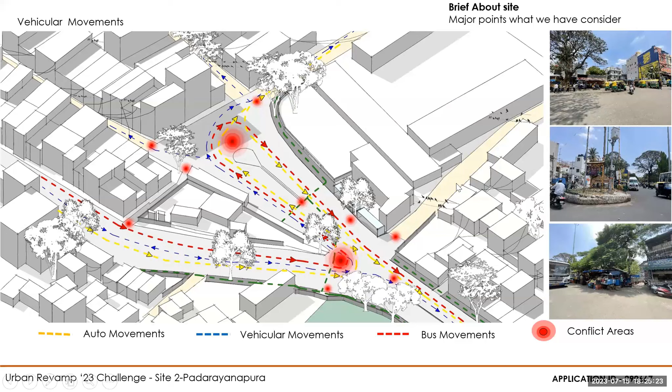So this is what I was talking about, the overlapping of the modes of transportation movement, which is actually inviting certain conflict areas, already marked in red.

Next. Next. Yeah, just give me a minute.

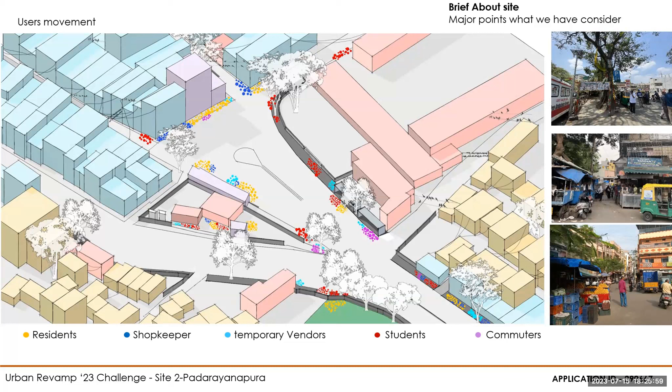And if we talk about user movement in the area, they are on the edges, but they are encroached by the different on-street activities, which we have already shown and are seeing in this photograph.

Next. Next, yeah sorry it's taking a while. Okay.

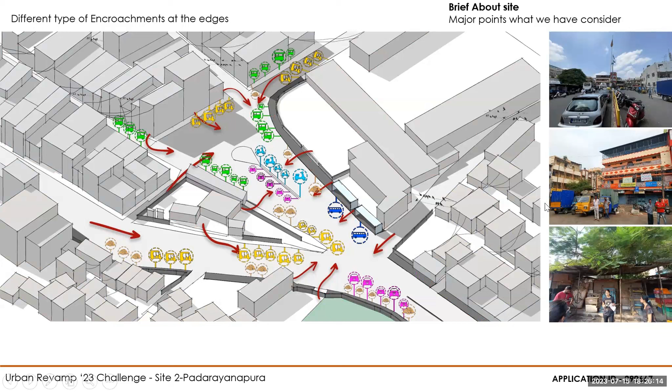So the edges are encroached by different on-street activities like vending, parking, garbage dump, and unauthorized auto stands, etc.

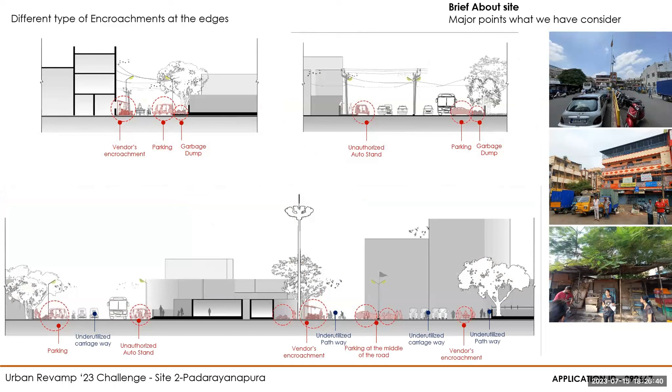Which can be clearly seen in this section slide, where on major roads or internal areas, unauthorized parking is happening actually in the middle of the road, and in the small streets there is also vendor encroachment and parking, which leads to unorganized pedestrian movement.

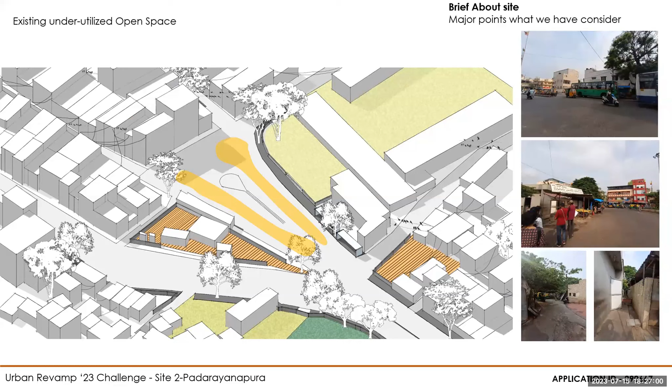So the edges are very active and in conflict with a lot of activities together, but there are certain underutilized open spaces existing on site, and some of them are actually unapproachable.

So after the physical analysis of this site, the focus of the analysis was also on issues raised by the stakeholders. Based on stakeholder interviews and findings from the on-site workshop we attended, we found there are 4 major points or aspects to be considered.

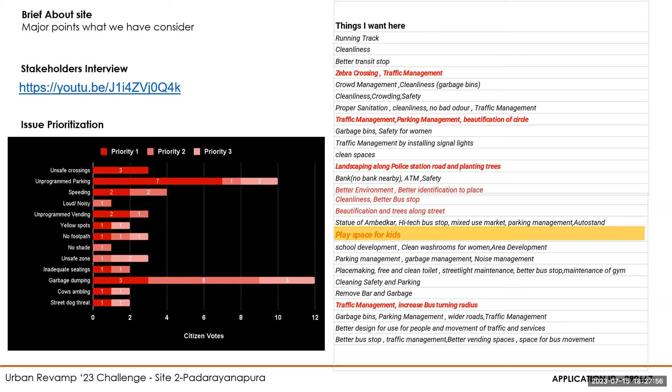So these are the things they already asked for in the stakeholder workshop. From this, we considered 4 points: enhancing the value of open space, inclusive street design with dedicated pedestrian movement, dedicated space for existing activities like vending, parking, bus stand location, etc., and carving out new opportunities.

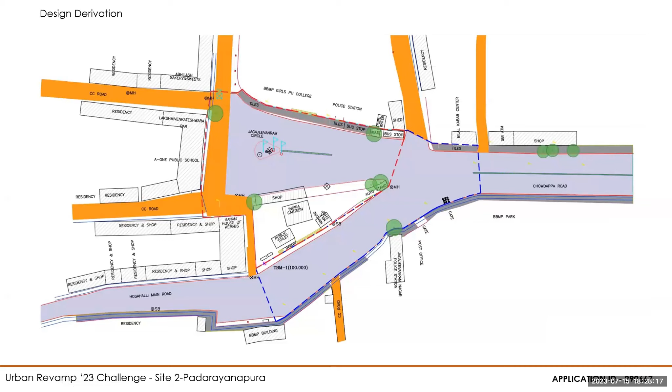So carving out the new opportunity, which is a recreational area for all age groups.

If we see the existing circulation pattern, the neighborhood is not connecting to the main Hosahalli road directly. It is connected with a very small narrow lane, which again has so many yellow dots—a lot of open space is underutilized.

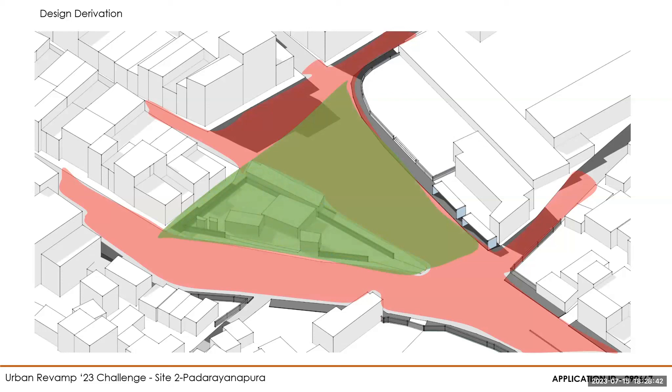The triangular activity land island is dividing the space into two.

So one large chunk of open space can be carved out from this kind of neighborhood.

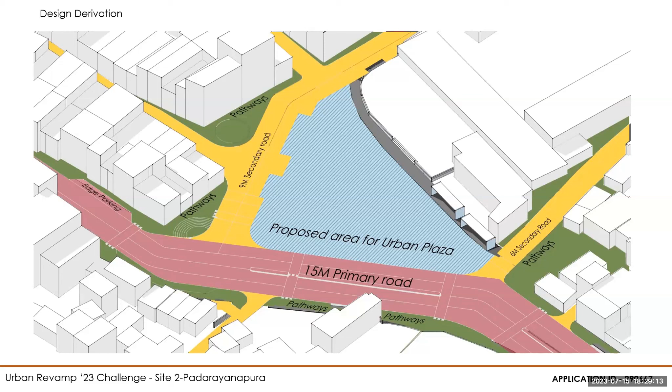So what we considered is connecting the 9-meter neighborhood road with the 15-meter primary road, which is Hosahalli road. This primary road can be designed with an evenly distributed 15-meter section with pathways on both sides, and there is a huge proposed urban plaza that can be carved out from these underutilized open spaces.

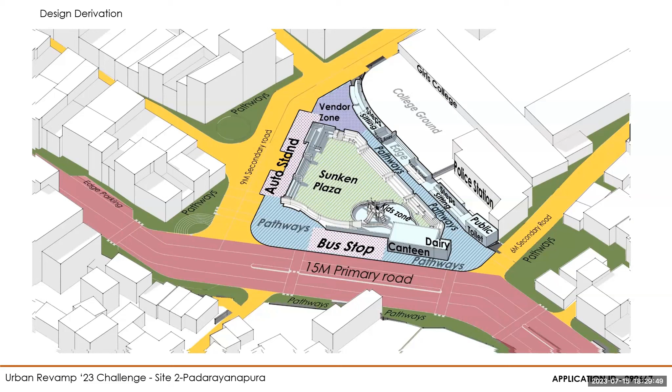So this plaza or this activity can be divided by proposing a level difference in the plaza, where the existing activities like pathway, bus stand, canteen, dairy, public toilet, auto stands, vendor zone can be utilized on the periphery, and the plaza where we have to provide a new kind of activity or recreational activity can be planned with a certain level difference in a sunken plaza.

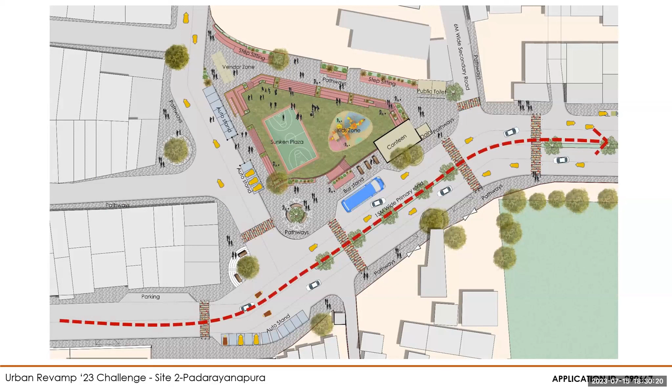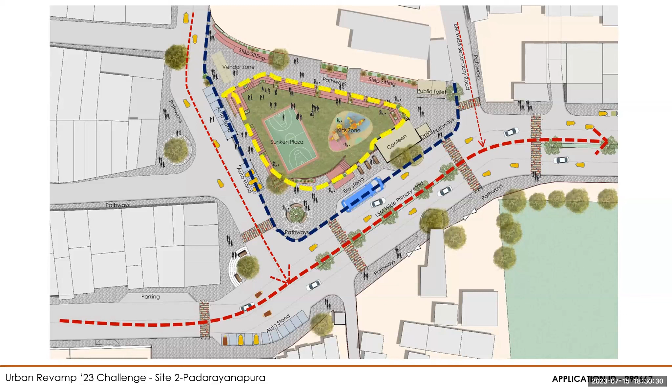So this is the overall scheme or master plan. The vision of the design is an active precinct with placemaking to establish street and open space as one experiential public realm, which offers citizens to use all modes of public transport, including walking, with a safe and dependable community experience, which creates an image of a place.

By restructuring the street network, rearranging the existing activity on the edge, and third, creating or introducing the recreational plaza, which is a sunken plaza.

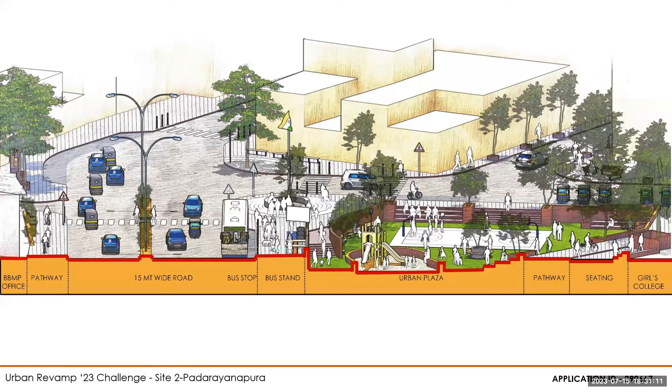So the restructured program includes existing activities and proposed recreational activity, which can be smartly segregated by placing them at a different level. So if you see, the major road, then a bus stand, then some sunken plaza for playing and recreational activity for users, because there are a lot of school and college going children and neighborhood children who can play here safely due to this level difference, giving visual connectivity and reducing the pressure of encroachment.

So the plaza design includes universal accessibility, as we have a ramp and stairs. It's a universal accessibility and barrier-free design of a sunken plaza, where more than 30% of the surface can be softscape for rainwater penetration into the land.

And the steps around the plaza segregate the activity as well as become seating space for the stakeholders, because in the interviews, a lot of stakeholders wanted space for senior citizens and they wanted a kind of cultural hub.

So the overall activities are divided as per the intensity of activity. For example, the bus station or bus stand and auto stand are placed at the main road for accessibility.

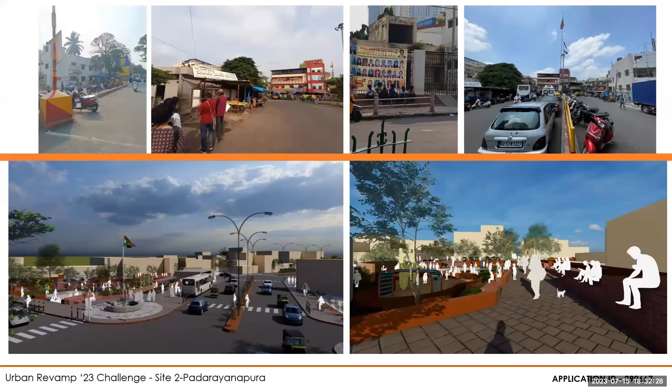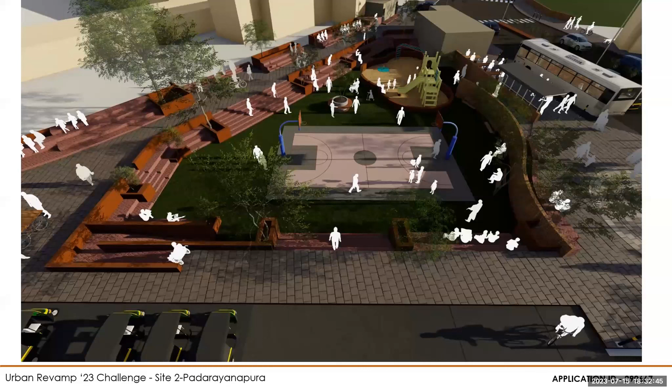Play area at the sunken level, sunken plaza can be accessed from all the continuous pedestrian pathways. Seating area along the compound wall of the college, the school, and the police station. And lastly, the vending zone at the edge of the neighborhood, where it can be accessed from the neighborhood thoroughly.

So this slide shows how the unused or underutilized space can be utilized through a design intervention like this.

So by providing a positive, well-defined and unique public space, we create a positive and associational feeling for its citizens, which makes them want to stay in the neighborhood. And the plaza design reflects the character and culture of the precinct around, because in certain stakeholder interviews, they were talking about historic times when they had a lot of play areas and playgrounds in the area, which are not there right now.

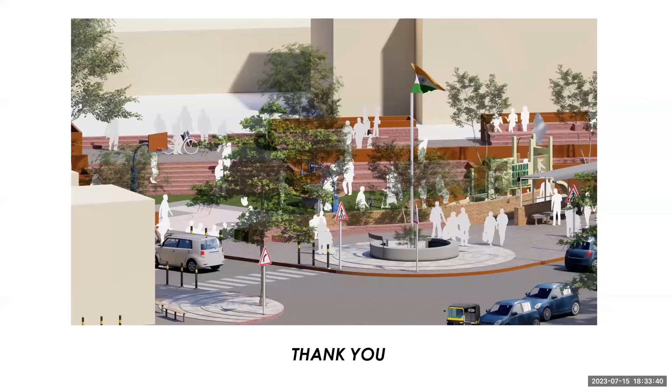So this reflects the character and culture of the precinct, and that's why this area or this proposal can be named Janasthala, which means space for the public.

Yes, this is it. Thank you.

Thank you so much, Chetan. Maybe we can begin with your questions and comments.

Yes, sure. So one of the things I would like to say is it is also similar to the previous project, an ambitious project by itself, with a lot of intervention, mainly change in the precinct. I had two big concerns. One, about the vehicular management you talked about—you should have looked at a larger level network than just focusing on the area, which would have improved your overall understanding of the movements, because currently the bus movement, taking a U-turn and managing to be at the bus stop as you're mentioning, could be a concern overall with the vehicular movement. That would add to the risk of pedestrian crossing, as Satyaprakash sir mentioned about the earlier project, because yours is the same space, and the bus taking a U-turn through that entire route where pedestrians are about to cross would be one of the biggest conflicts.

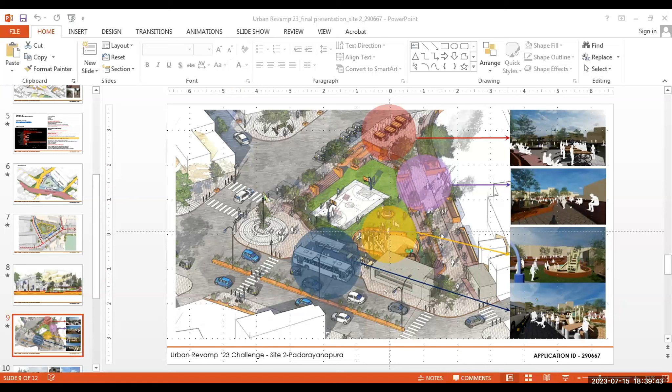Just a second, ma'am, you can just share the screen. If you see my cursor, this is an entry for the college and this is an entry for the police station. Your shared screen shows only part of it, not the full screen. Would you like me to share again? Point to slide 9 - it's on slide 9, okay.

Ma'am, it is only a pedestrian access to the college and the police station area. Can we move on then? I think Hema, that's it.

Sure, Naveen, you could ask your questions. My main thing is the whole design problem revolves around how the bus turns around and yet has a safe space. I don't think that's addressed at all, and I think that was one of the main issues of the site. Otherwise everything else is secondary for me. Once the problem solving is done is when we can discuss value addition. But that's the main thing - where does it turn around?